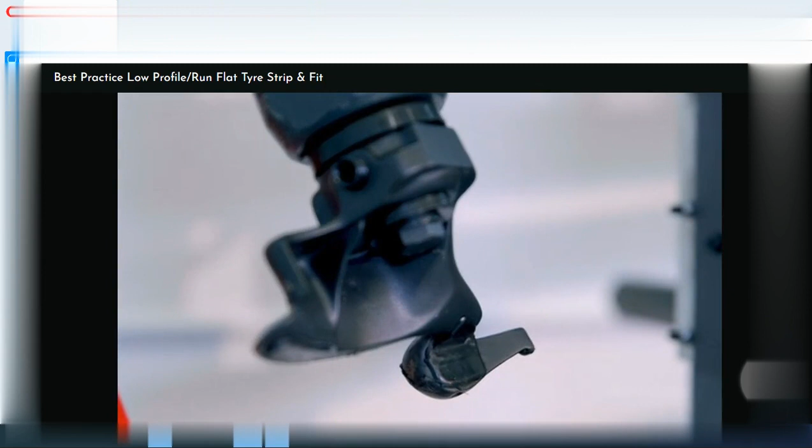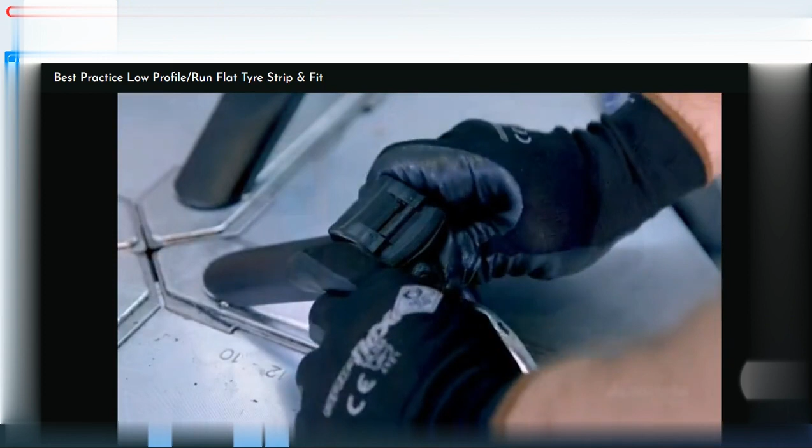Before starting any tyre change, take the time to inspect all protective covers fitted to the machine. Replace any damaged or broken protectors. These are here to prevent damage to expensive rims and tyres.

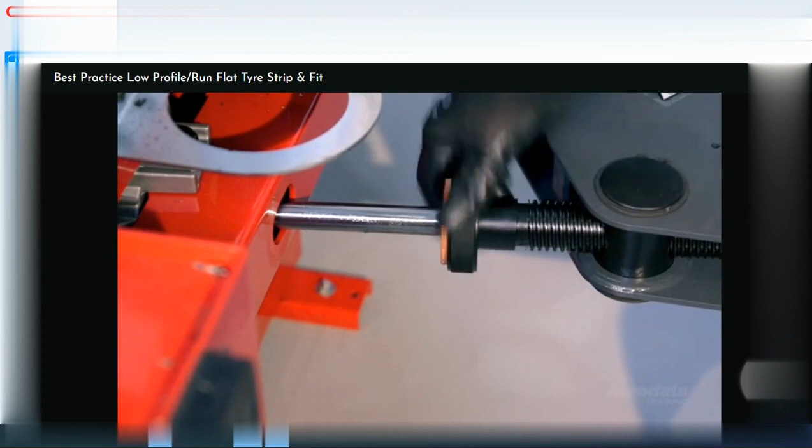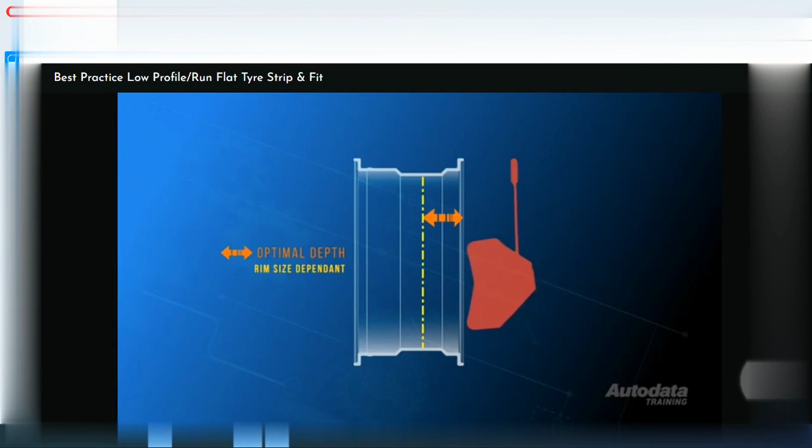We should always adjust the blade depth or stroke before breaking the bead on any wheel, and this is especially important on run flat designs. The optimal depth will change according to rim size, but the blade should stop as soon as the bead has rolled over the bead lock and dropped into the well.

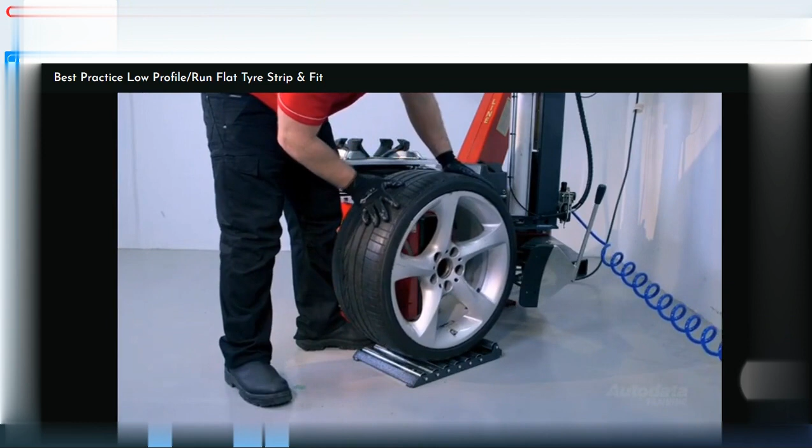Position the tyre and spade as normal, avoiding the area around the valve and tyre pressure sensor. Apply pressure to the tyre until the bead rolls over the seat and drops into the well. Wait until the shovel is stopped, then brush some tyre lube into the bead. Rotate the wheel and repeat this process in several spots around the wheel.

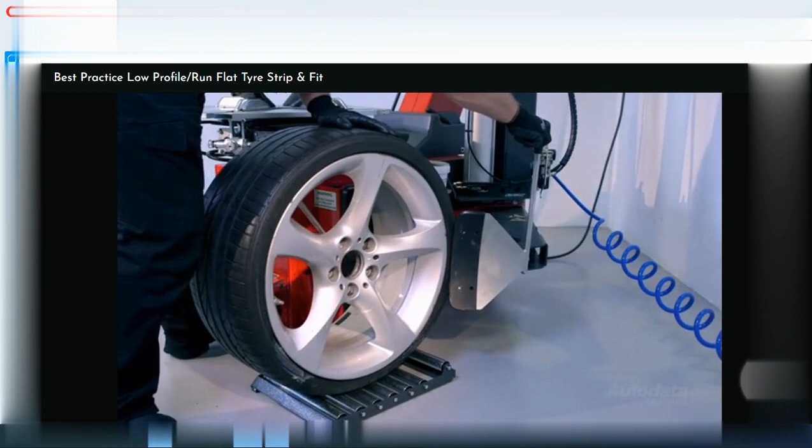Repeat the same process on the reverse side of the wheel assembly.

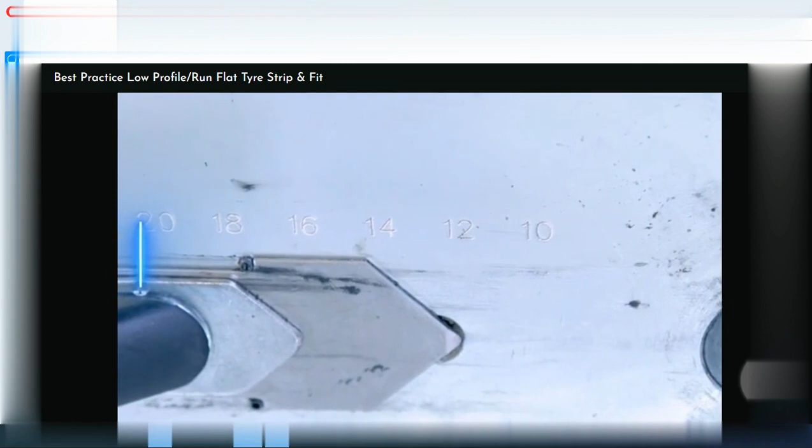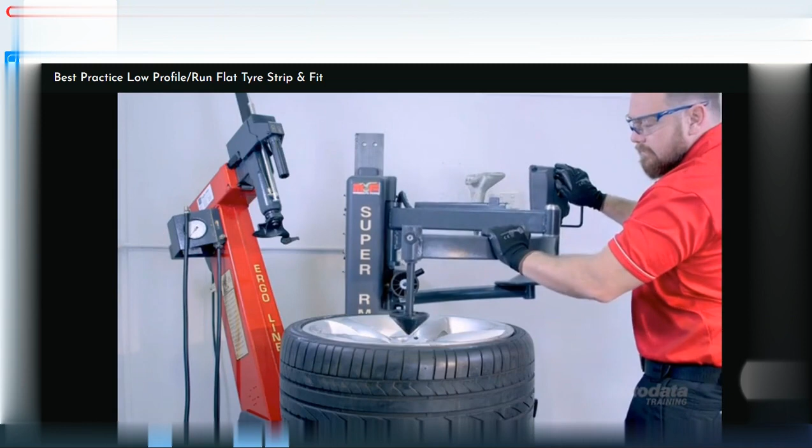Open the jaws to 1 inch larger than the rim size. Lift the wheel into the turntable with the front of the rim facing up. We'll use the conical adapter on the multifunction arm to help push the rim into the turntable jaws as they close and lock. Lower the arm so pressure is applied evenly.

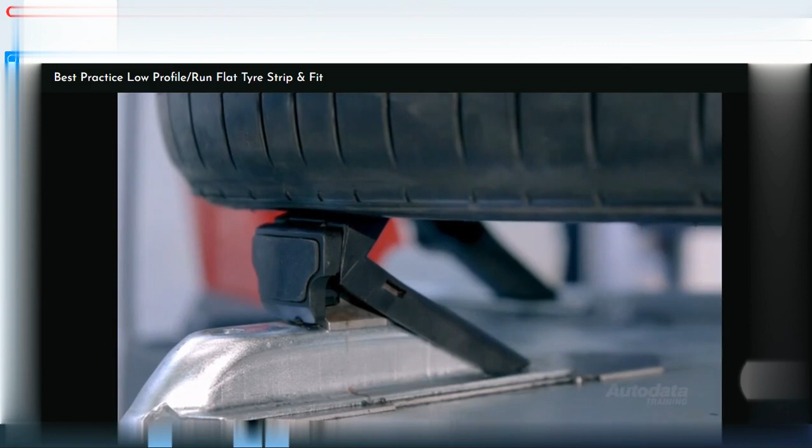Clamp the rim using the appropriate pedal, then release the multifunction arm and remove from the work area. At this point, due to the rigid sidewall, you may find that some of the bead has reseated to the rim.

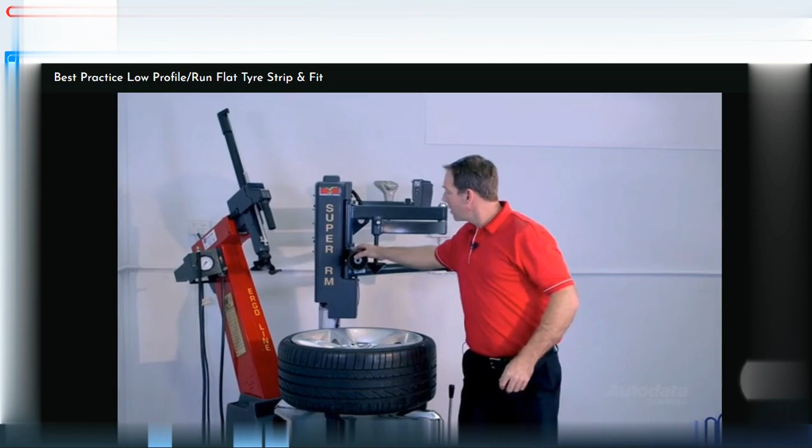So to address this, we're going to use the multifunction roller. Press the roller down on the bead and rotate the tyre, once again being mindful of tyre pressure sensors fitted to the valve. Brush in some more lube if required.

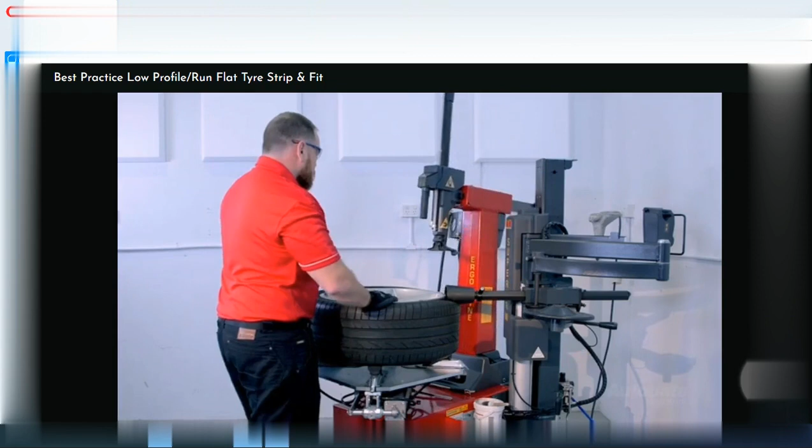Bring the tilt arm forward and position the foot as normal. Return the multifunction roller to its home position. If the tyre is really tight, it's a good idea to use additional rim protectors as the arm and foot will flex under extreme loads.

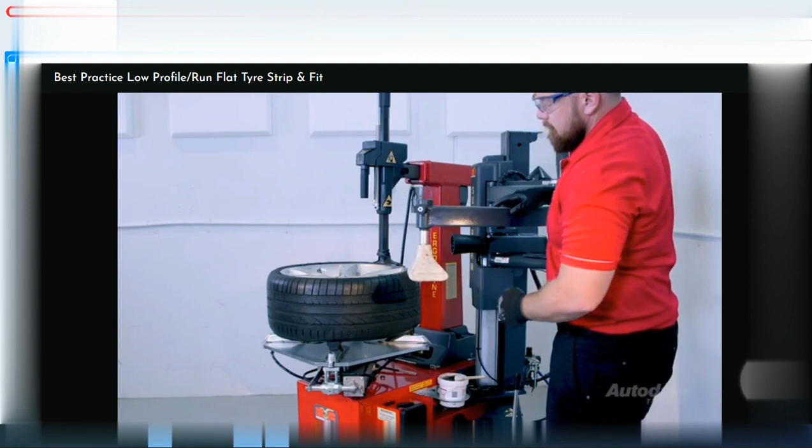We can now attach the wedge block to the multifunction arm and lower it onto the bead around the 3 o'clock position. This makes it relatively easy to insert the lever between the foot and tyre bead.

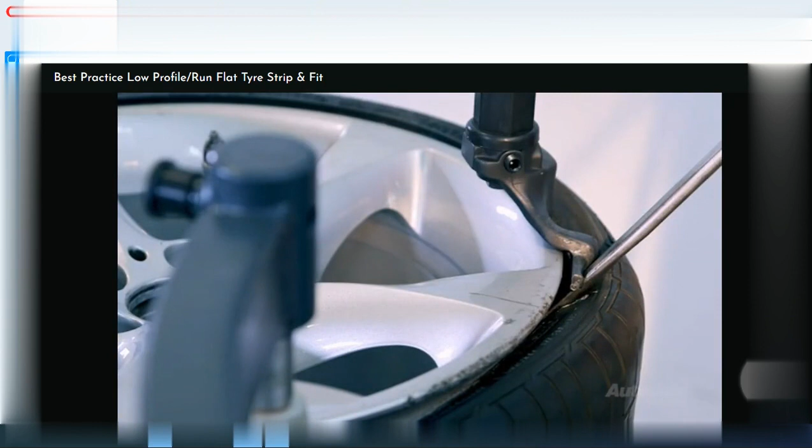Move the wedge block and multifunction arm to roughly 6 o'clock and then lower, applying pressure to the sidewall. This pushes the tyre into the well, making it easier to pull the lever and bead over the operating foot.

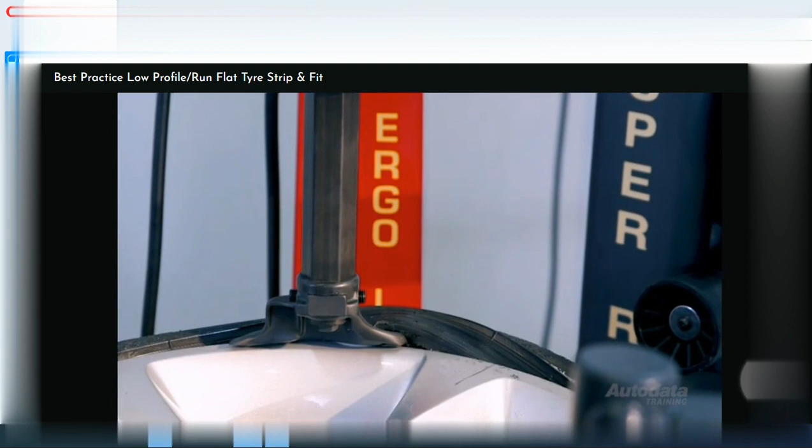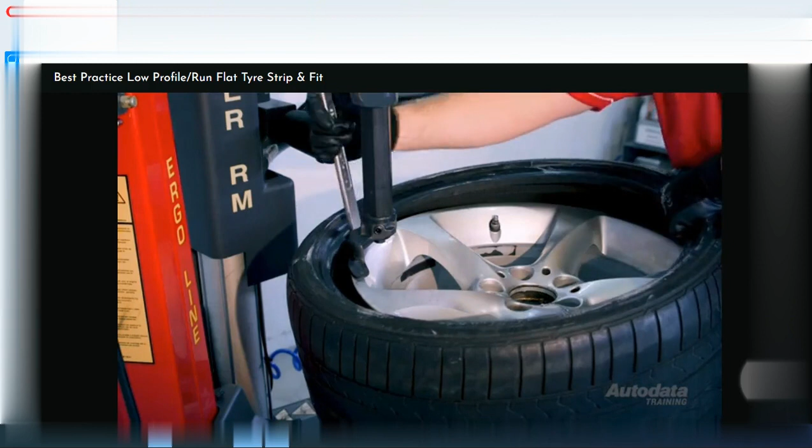Remove the multifunction arm and rotate the turntable clockwise until the top bead has been removed from the rim. We can then lift the tyre into the well and remove the lower bead.

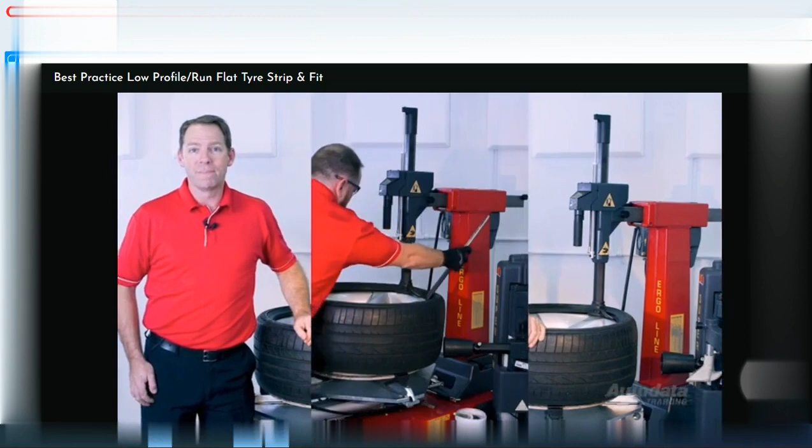On some wheels, it won't be that easy. It's possible for super heavy, wide or firm tyres for the lower bead to reseat, making the job impossible. For these tyres, return the tilt arm to its rest position. We can then use the rollers to remove the lower bead completely from the rim.

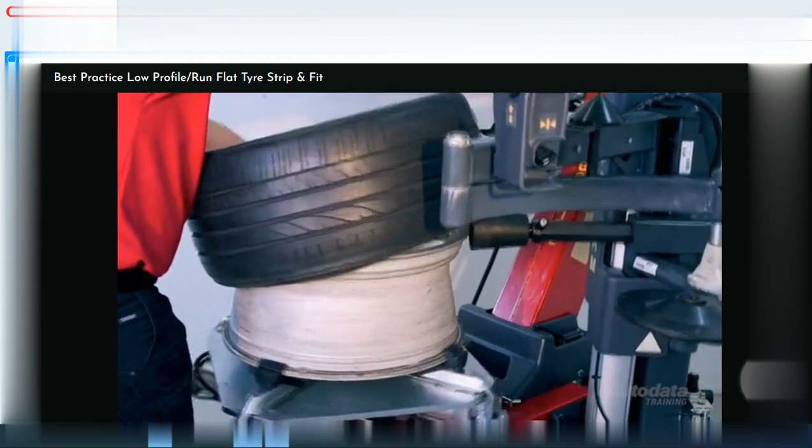Service or replace the valve if required. Check the tyre sidewall for any specific fitting instructions.

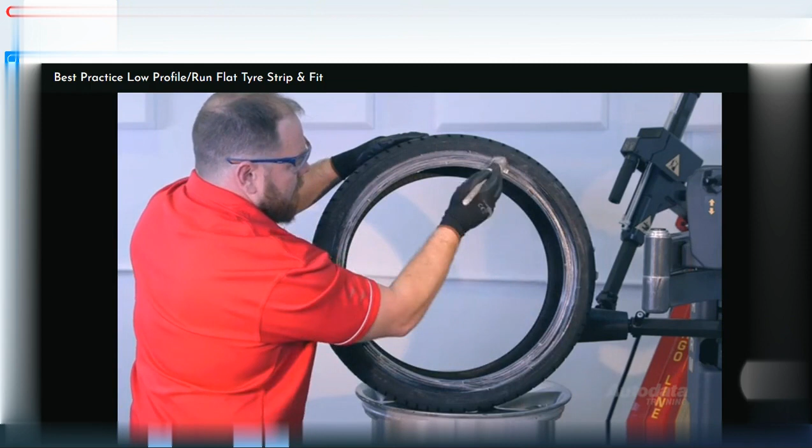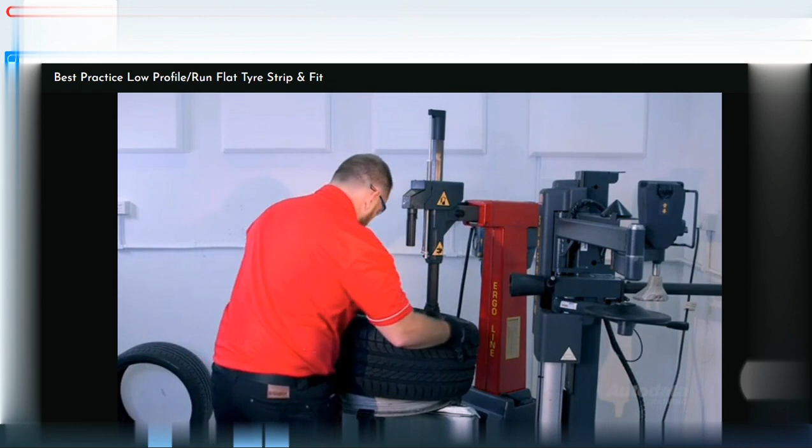Lubricate the tyre bead with fitting paste, making sure to cover the area where the outer sidewall meets the bead. Bring the tilt arm forward and fit the inner bead as normal, finishing with the valve at the 6 o'clock position. Now comes the really difficult part.

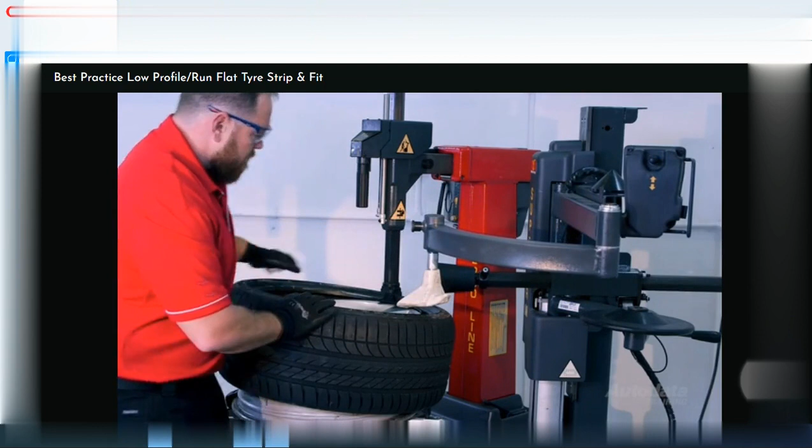If we get this next step wrong, we can cause some serious and expensive damage. Move the multifunction roller close to the rim and then bring the assist arm and wedge to the 3 o'clock position. We need to lower the arm and apply just enough pressure to gently push the bead under the foot.

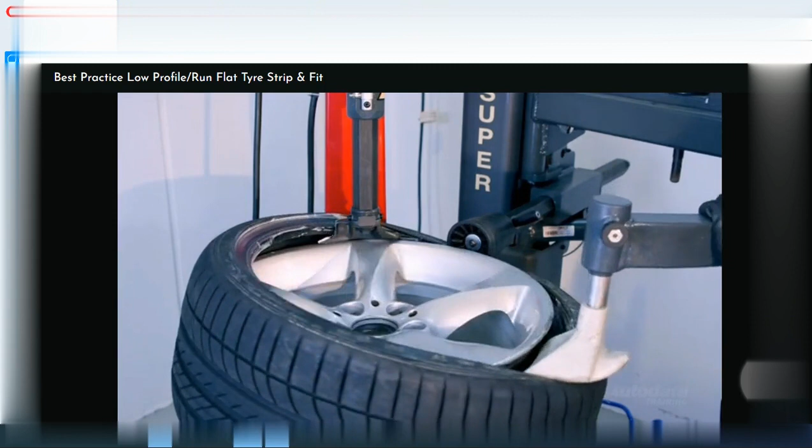Slowly rotate the turntable a quarter of a turn, bringing the assist arm to 6 o'clock. Let's stop and assess the situation.

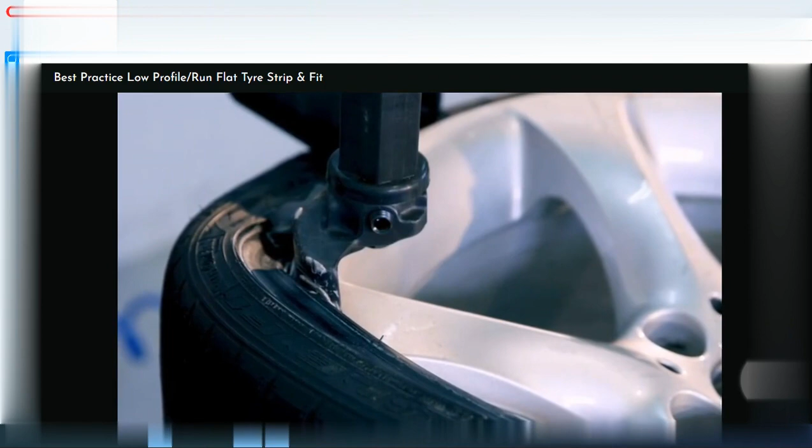Is the bead sitting under the foot correctly? Has the bead dropped into the well? If not, it might be necessary to carefully apply pressure with the tyre lever to work the bead down.

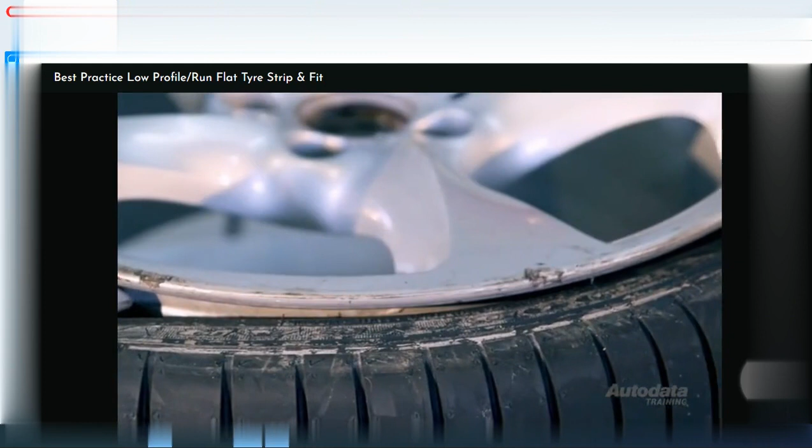If all looks okay, continue to rotate the tyre slowly, watching until the bead is fitted correctly.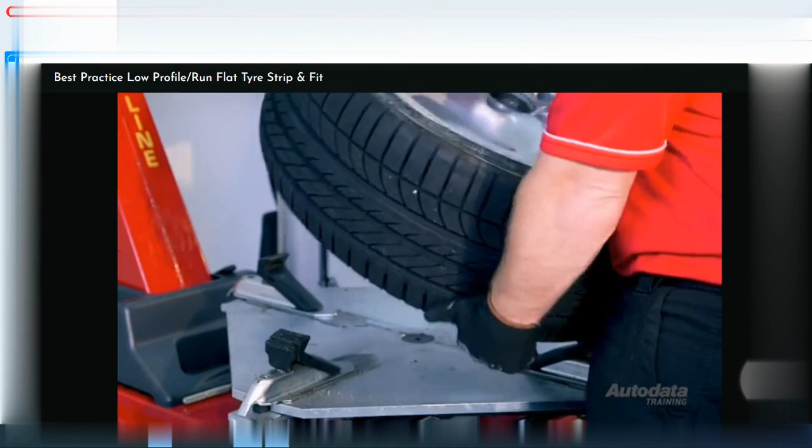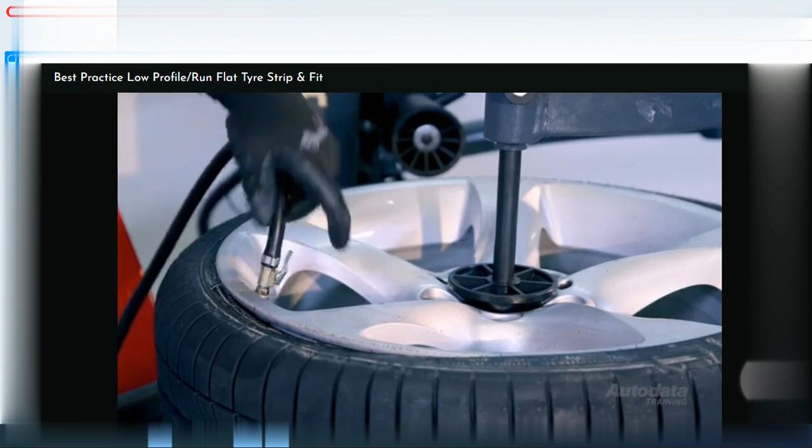Release the locking jaws, remove the wheel and close the jaws. Lay the wheel back over the turntable and use the conical adapter on the multifunction arm to secure the wheel whilst inflating. Once done, we can refit the valve core and inflate the tyre to the manufacturer's specifications.

And that's how you correctly remove and fit a low profile or run flat tyre. Follow this procedure and you simply can't go wrong.